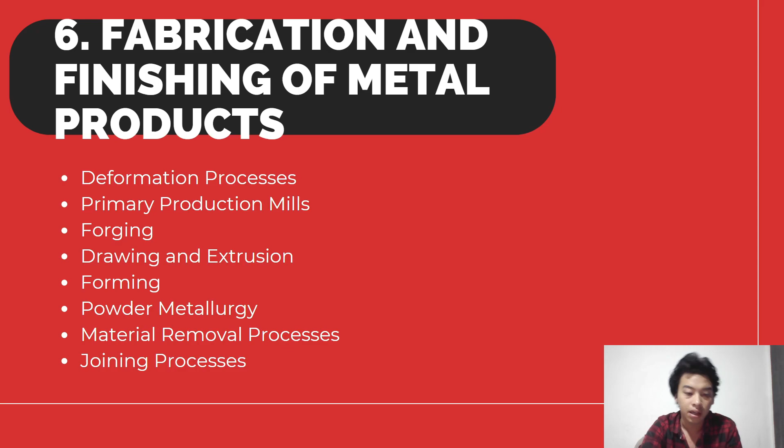Deformation processes. In metalworking processes, a workpiece such as a billet or blank sheet, for example, can be plastically deformed by a set of tools or dies to obtain the desired final thickness and geometrical configuration. Metal forming processes can be classified into two general categories: bulk or massive forming operations, and bending and sheet forming operations. Sheet forming is sometimes simply referred to as forming.

In the broadest and most accepted sense, however, the term forming can be used to describe both bulk deformation processes, sheet forming, and bending processes. The major distinction between bulk and sheet forming is the nature of the resulting deformation. Bulk forming operations typically involve multi-directional deformation throughout the volume of the work mass. The generic types of bulk working methods include extrusion, forging, rolling, and drawing.

Some methods such as open die forging and radial forging are used in both primary mill production and in the production of finished parts. In contrast to bulk forming, sheet forming typically involves local deformations. During sheet forming, a piece of sheet metal is plastically deformed by tensile loads into a three-dimensional shape, often without a significant change in its thickness or surface characteristics.

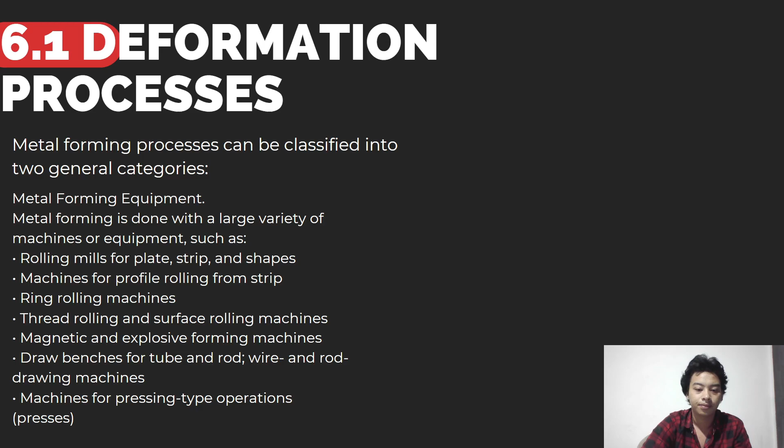Primary production mills. In primary production operations, the initial stage of metalworking involves breakdown of the cast structure into wrought work forms. Starting material is usually either an ingot from a static or stationary mold casting, or a continuous cast slab or billet. With conventionally cast ingot structures, workability is very low due to the relatively coarse microstructure and extensive segregation of impurities.

Thus, ingots undergo a primary production step that consists of either forging or rolling, or ingot breakdown, as they are processed into semi-finished shapes or blooms, billets, and slabs. Continuously cast alloys require no primary reduction step. The next step is the mill processing of blooms, billets, and slabs to produce various product forms such as plates, sheet, strip, and bar.

Ingot breakdown. Many ingots continue to be statically cast because not all ferrous and non-ferrous metals are capable of being continuously cast, due to their relatively coarse and inherently weak microstructure. The temperature range over which ingot structure can be formed is very limited.

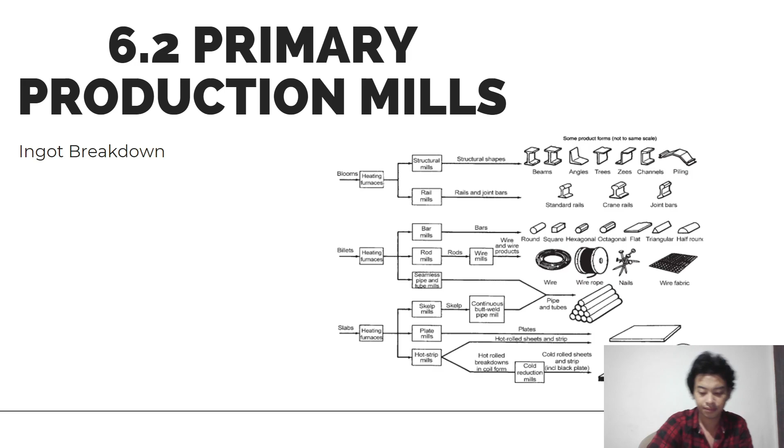Forging. In its basic form, forging consists of applying compressive stress to a piece of metal, known as a workpiece, between a pair of dies in order to permanently change its physical dimension or geometry. Large forgings are processed by primary mills, but forgers also purchase raw products in the form of bars, billets, or blooms for subsequent forging on hammers and presses. Various types of forging process are listed in the table.

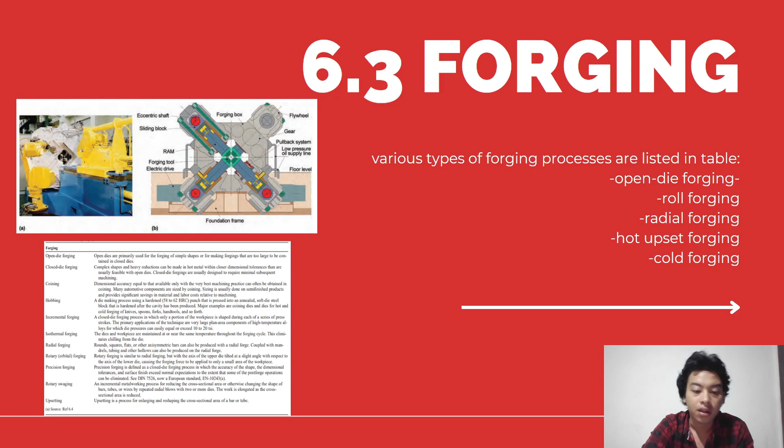Open die forging, roll forging. Advantage: the basic advantages of the roll forging process include continuous production of forged product, improved grain flow, better surface finish and breakdown of scale in steel forging, preform mass distribution that saves material, reduced flash, increased die life, and reduced cost in subsequent finish forging operations. Radial forging, hot upset forging, and last, cold forging.

Drawing and extrusion. Drawing and extrusion are based respectively on the pulling and pushing of sections through dies. In the drawing process, the cross-sectional area and/or shape of a rod, bar, tube, or wire is reduced by pulling it through a die. The deformation is accomplished by a combination of tensile and compressive stresses that are created by the pulling force at the exit from the die and by the die configuration. Metal flow during extrusion through a conical die is analogous to drawing because the metal is forced through the die region.

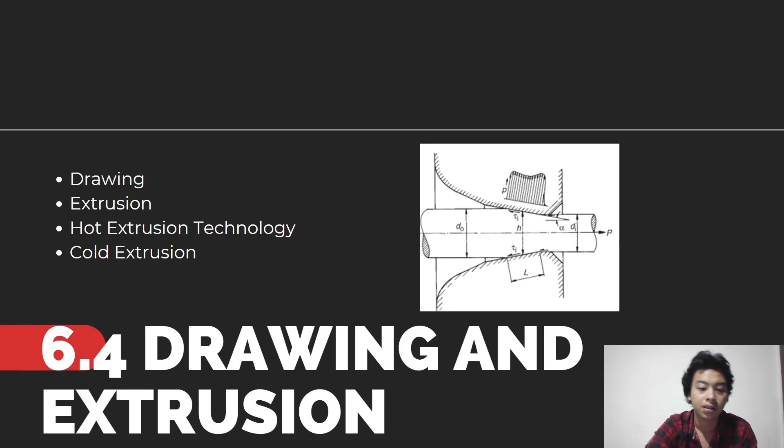Wire drawing is one of the oldest metal forming operations to make long products with excellent surface finish, closely controlled dimensions and constant cross section. Extrusion is the deformation process used to produce long, straight, semi-finished metal products such as bars, solid and hollow sections, tubes, wire and strips. Extrusion has two types: hot extrusion and cold extrusion.

Forming. Metal bars, tubes, plates and sheets are formed by various bending, stretching, and drawing operations. Bars and tubes are formed mainly by bending operations such as compression bending, stretch bending, draw bending, and roll bending. Springback is a major factor in forming operations. As an example, consider a simple bend. The tensile stress is a maximum at the outside surface of the bend and decreases toward the center of the sheet thickness. The stress is zero on the neutral axis.

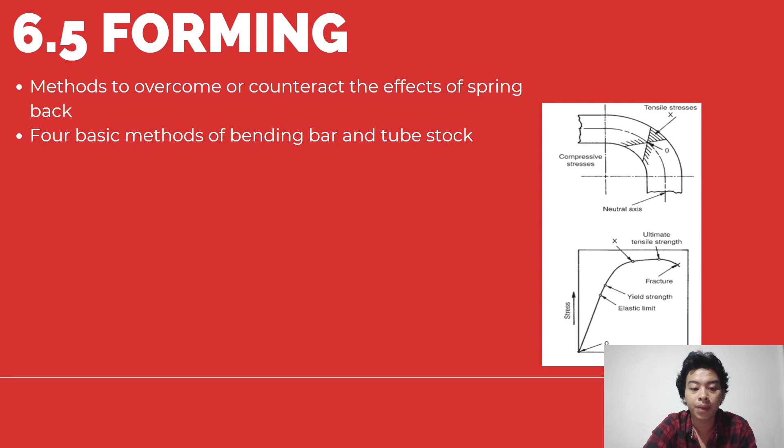In bending, methods to counteract the effect of springback are overbending, bottoming or setting, and stretch bending. Sheet metal is often overbent by an amount sufficient to produce the desired bend angle after springback. Bending of bar and tube: the four basic methods of bending bar and tube stock are compression bending, draw bending, stretch bending, and roll bending.

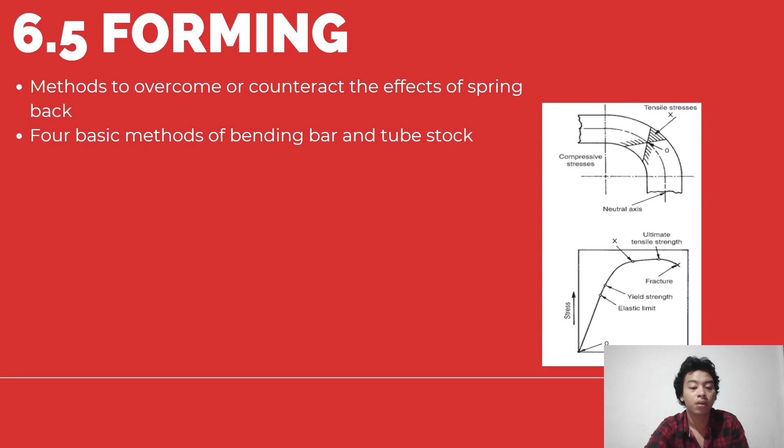Powder metallurgy. Powder metallurgy is a growing branch of metallurgy based on the production of material in the form of metal powder and the manufacturing of parts from these materials. The most common method of parts production is a two-step process of powder compaction by pressing and densification by sintering, referred to as PM pressing and sintering. Fabrication of parts by the PM method has several advantages that include producing parts with more uniform microstructure and distribution of alloying elements, high volume production of parts with net shape or near net shape dimensions, thus reducing the need for finishing, and flexibility in component design.

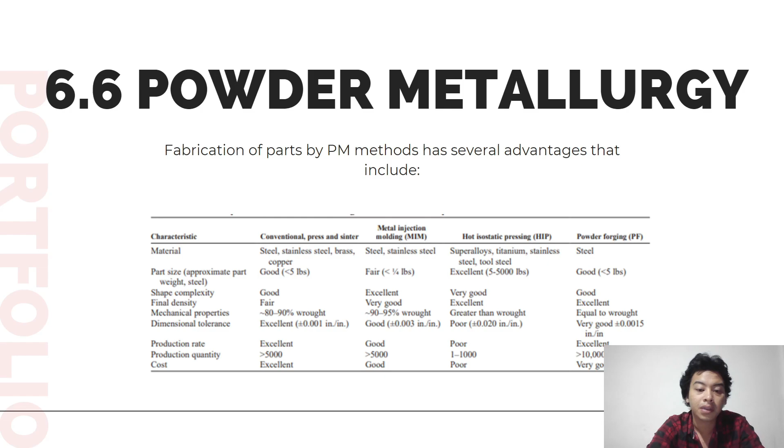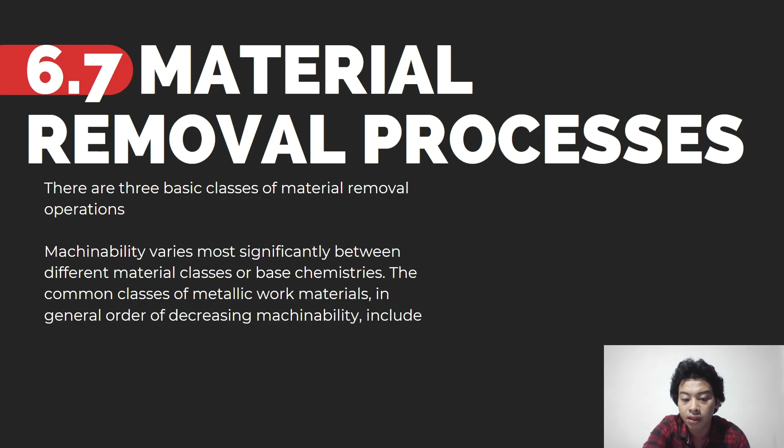Material removal processes. Material removal processes, of which machining is a special class, are secondary manufacturing operations used to achieve precise tolerances and controlled surface finish quality. There are three basic classes of material removal: conventional machining operations such as turning, drilling, milling, boring, planing, shaping, reaming, and tapping, where material is removed from the workpiece in the form of chips; abrasive processes such as grinding and honing, where small particles are removed from the workpiece by abrasion with a hard tool.